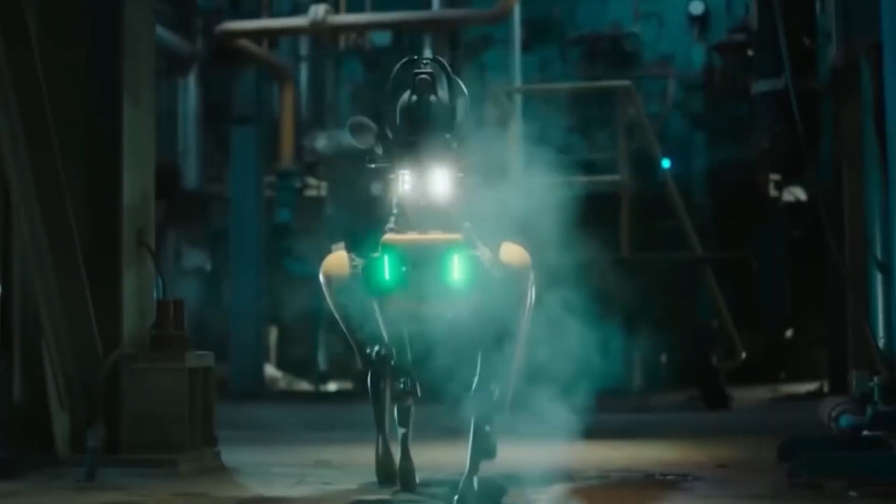What is Boston Dynamics? How many of you guys are familiar with this? Well, let's take a look at it.

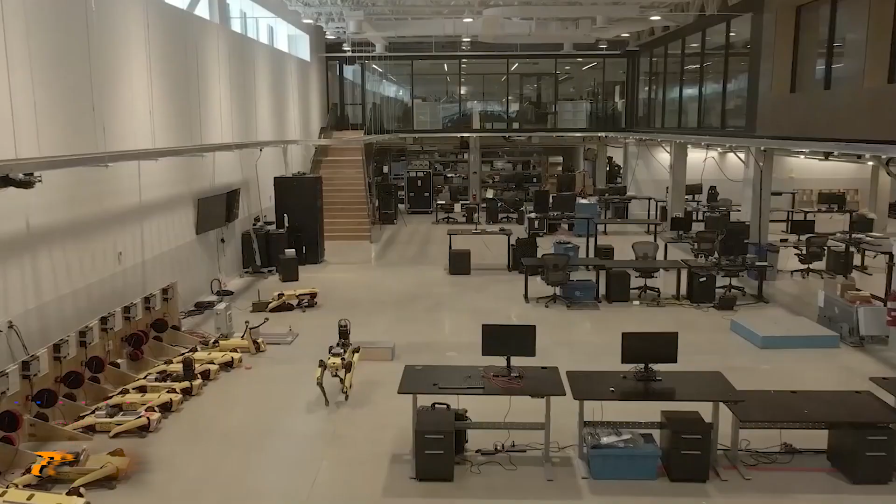As a Massachusetts Institute of Technology spin-off, Boston Dynamics is an American engineering and robotics design firm established in 1992. Headquartered in Waltham, Massachusetts, it has been part of the Hyundai Motor Group since December 2020, though the acquisition was finalized in June 2021.

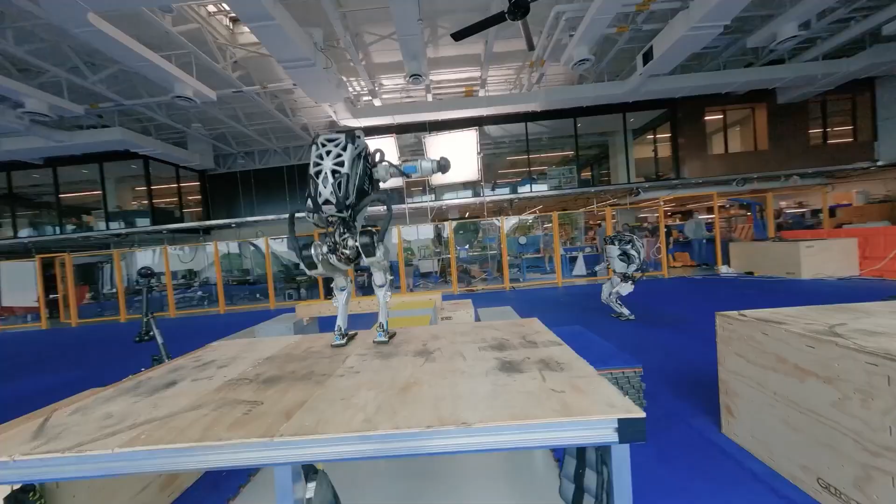In today's episode, we will watch a super robot army that Boston Dynamics has secretly built.

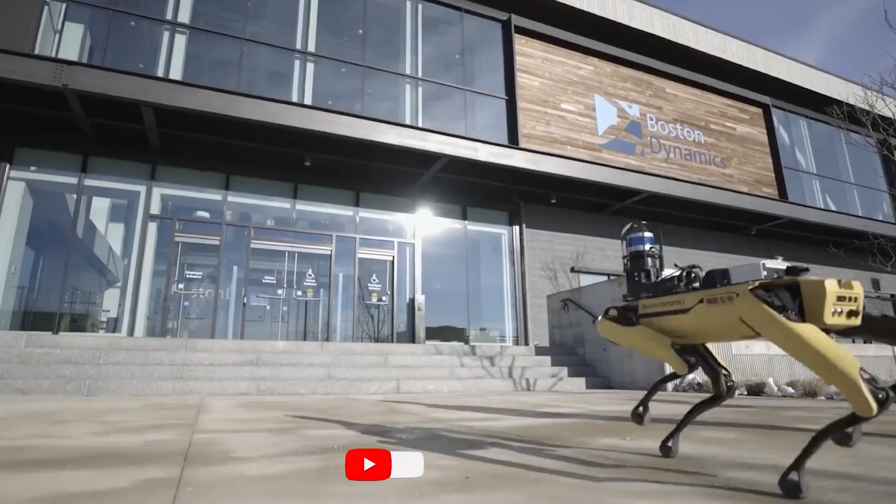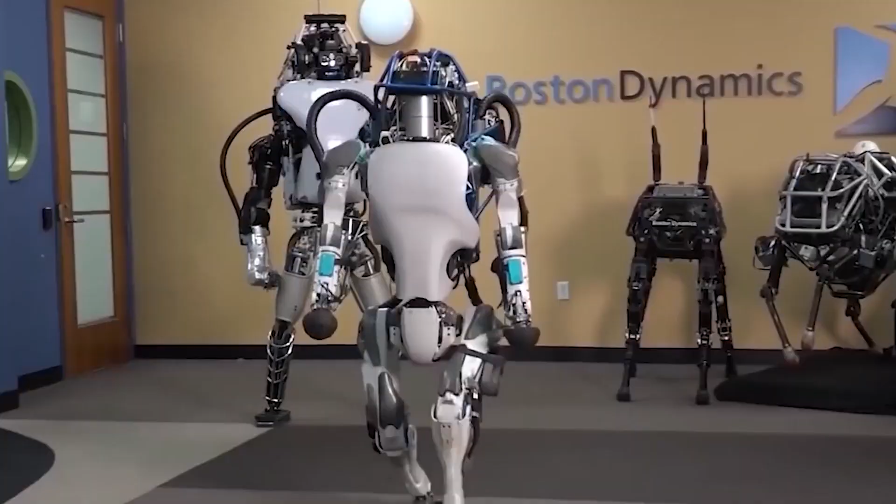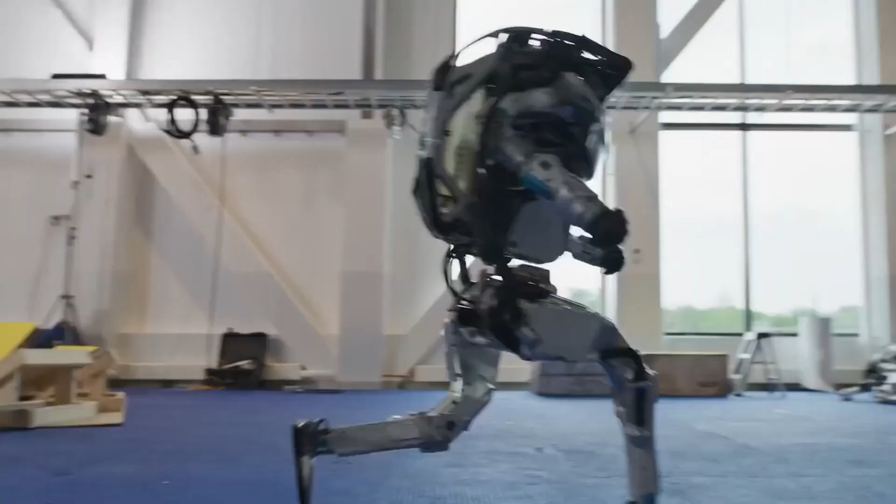The accomplishments of Boston Dynamics resemble the opening credits of a science fiction film. Beginning with the bulky Big Dog, a quadruped robot made for the military, the business has watched each new generation of robots relentlessly outperform the previous. Their announcements can occasionally make you feel more uneasy than impressed. What was formerly only hypothesis is now regularly transported from Boston Dynamics' plans.

It might just sound funny, but let's see it in detail some more.

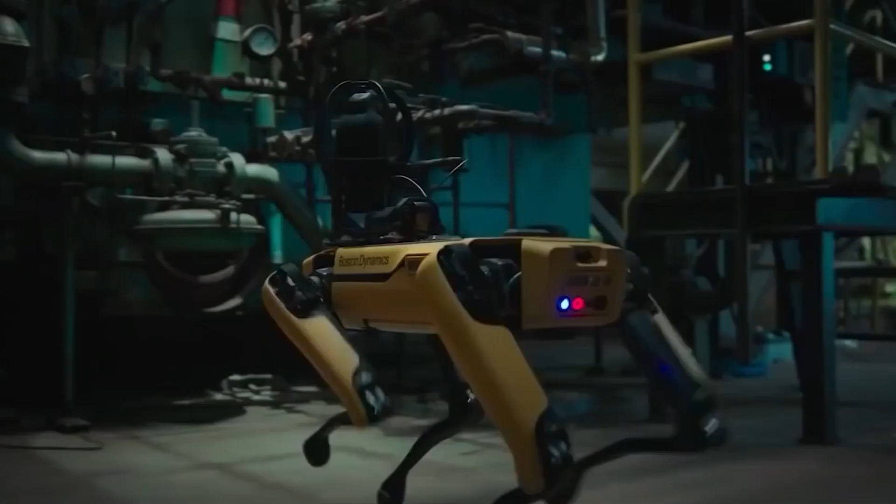Marc Raibert established the business after separating it from the Massachusetts Institute of Technology in 1992. The Leg Laboratory, Raibert's research facility at MIT and Carnegie Mellon University, served as a foundation for the corporation. The scientific foundation for extremely dynamic robots was established in part by the Leg Laboratory. These robots were inspired by the ability of animals to move with agility, dexterity, perception, and intelligence. The robots' similarity to their human creators grows throughout.

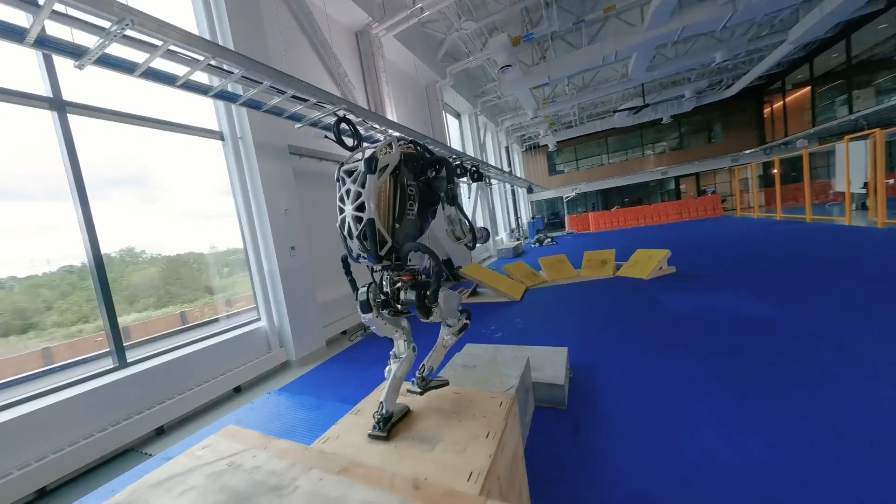In this video, I'll examine the startling rise of this groundbreaking robotics company and provide a detailed analysis of its expanding super robot army. Since Big Dog, Boston Dynamics has gone a long way. Look at this family, or super army of robots.

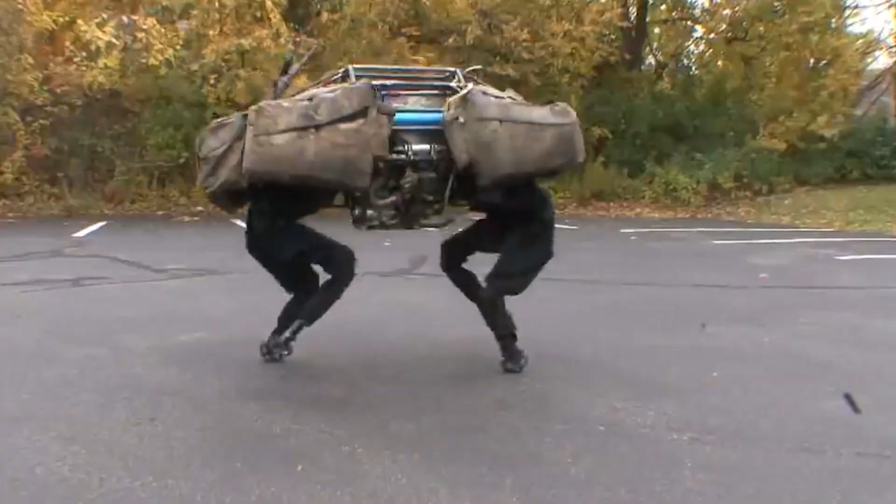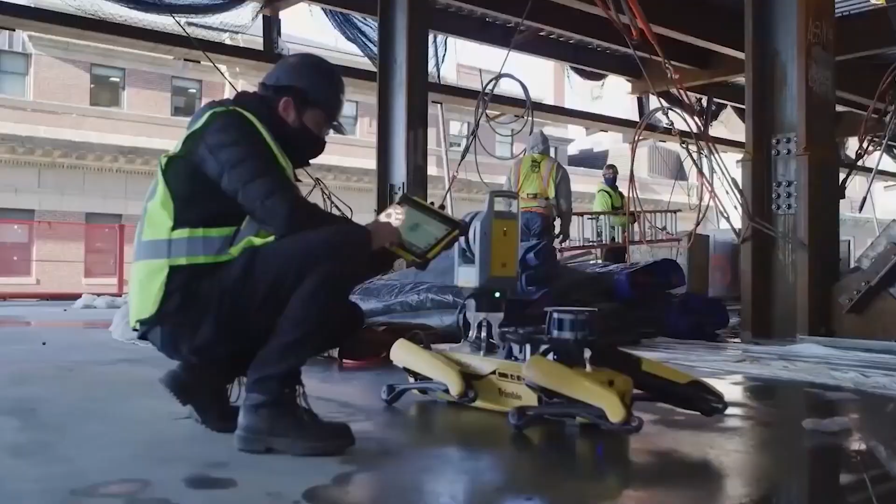Spot, a direct descendant of Big Dog, comes first. Spot is as graceful as it is accurate, unlike its grandfather. Spot can move across practically any terrain with ease and incredible mobility. It's ideal for jobs requiring routine inspection and data collection. Plus, the entire process can be automated, which is much better.

Now we'll dive into the core of the topic of what Boston is trying to build. Is it a robot, or is it a robotic army as they call it? Well, let's find out. Boston Dynamics aims to design and build great robots that improve people's lives.

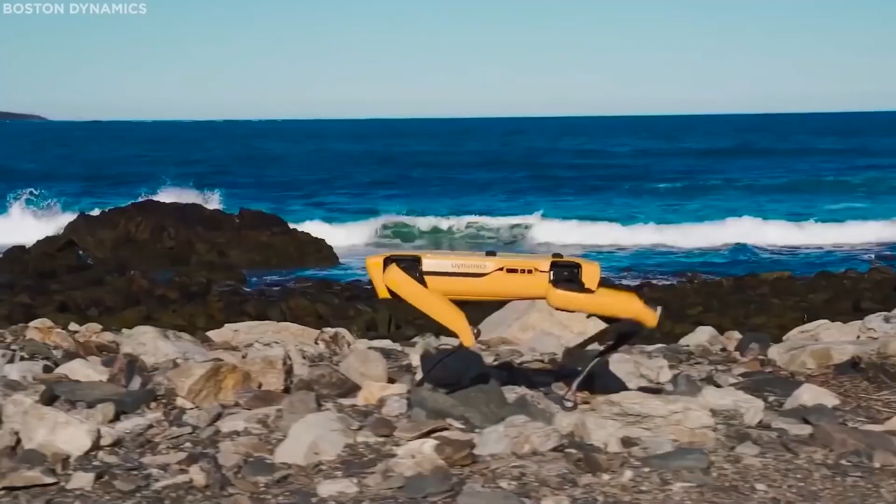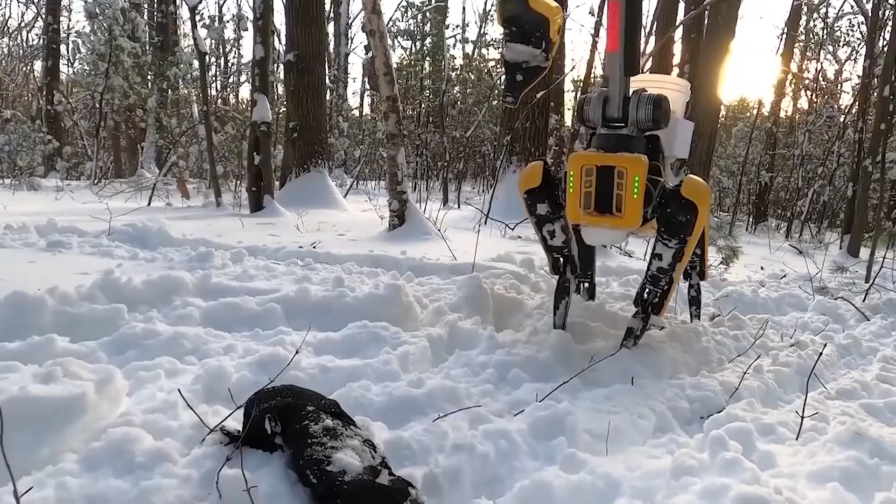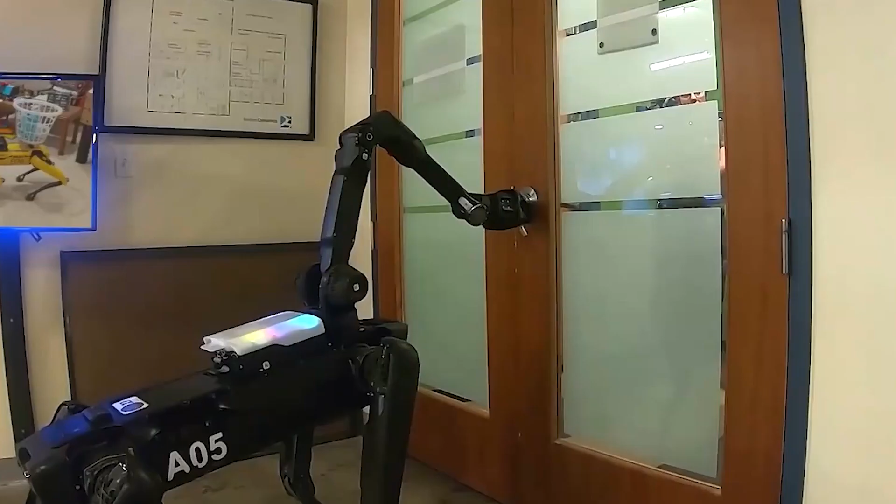A significant engineering issue is creating machines close to human and animal mobility, skill, and agility. Our curiosity and respect for nature drives our work on robotics. The robot's feet allowed it to traverse through rough terrain. Now the robot has hands, and these simple grippers give the robot a new life. It has a 4K camera and an LED light to examine an object before picking it up. In other words, Spot will open the door and leave by itself if it wants to go for a stroll.

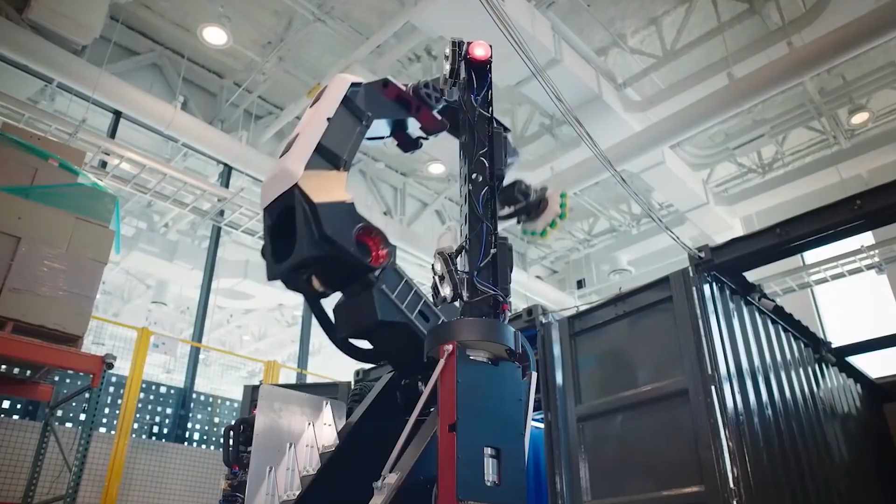The powerful Stretch is the next opponent. Stretch was created for manufacturing labor and could assemble and unload pallets. Despite its size, it's no less graceful and can easily carry weight around a warehouse or even a factory. This makes it much more adaptable in its function and eliminates the requirement for fixed infrastructure.

Of course, the most sophisticated humanoid robot in the world, Atlas, who can now backflip, steals the show. The building has received significant improvements since it was first revealed in 2013.

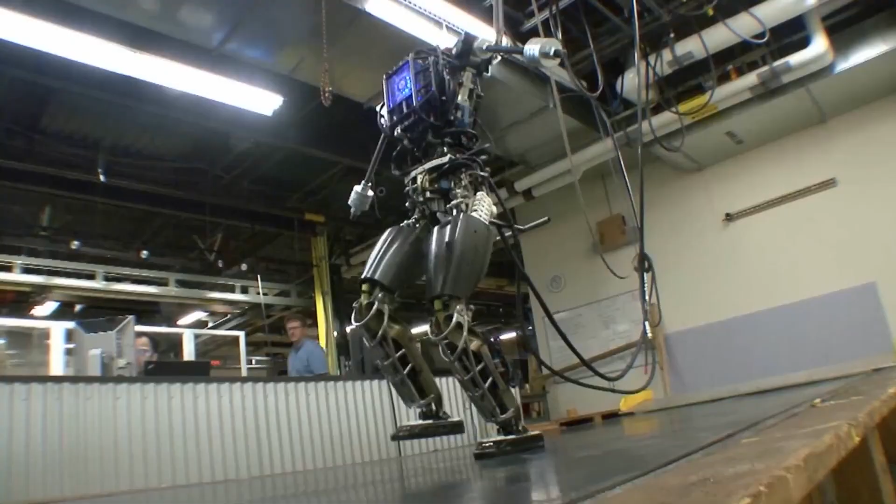A 1-year-old youngster can hardly walk, said DARPA program manager Gill Pratt when comparing Atlas to a child. A 1-year-old baby frequently trips over things. Thus, this is where we are right now. What is the structural appearance of this Atlas? After over 10 years, Atlas is finally fully operational.

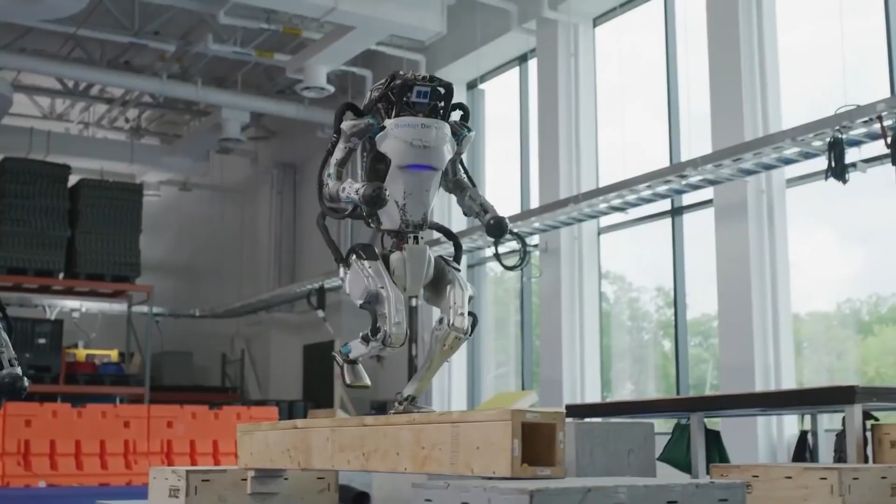The 190-pound robot stands 5 feet tall and has 28 hydraulic joints. It can travel at a top speed of 2.5 meters per second and uses sophisticated algorithms to navigate a variety of difficult scenarios. The Boston Dynamics team used behavior libraries to help construct complex routines and more effectively achieve trajectory optimization to achieve such exact mobility.

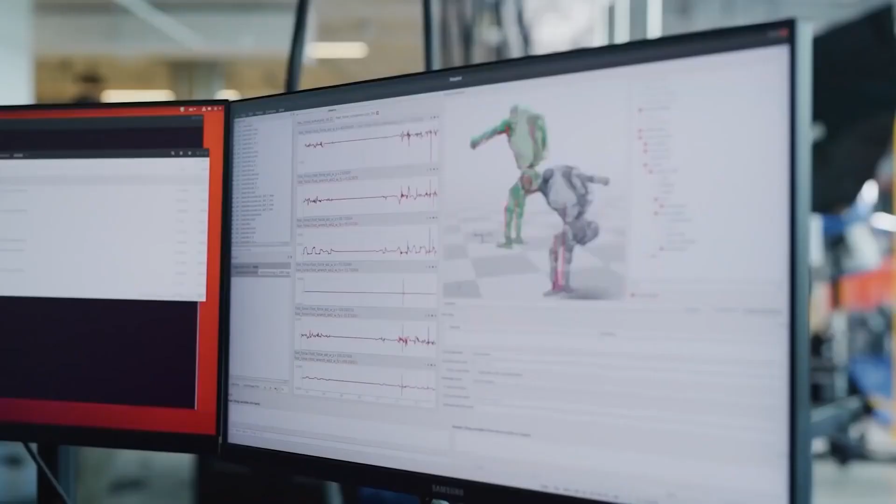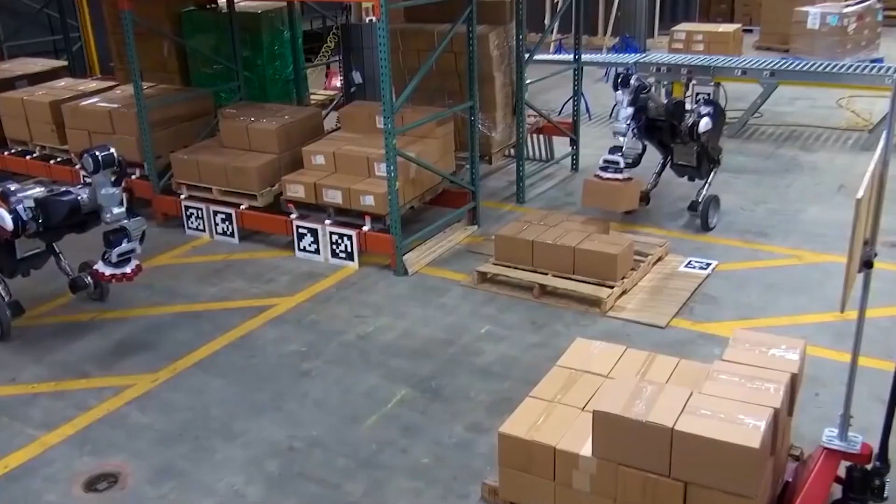All we have to say is this huge army of robots is an outstanding accomplishment all around. But what does this mean for us? Boston Dynamics frequently wants to highlight how amiable its robot family is. In their ideal future, robots are our friendly companions rather than our oppressive overlords.

Their robot, Spot, acts like a dog. The toughness of these robots is part of their appeal.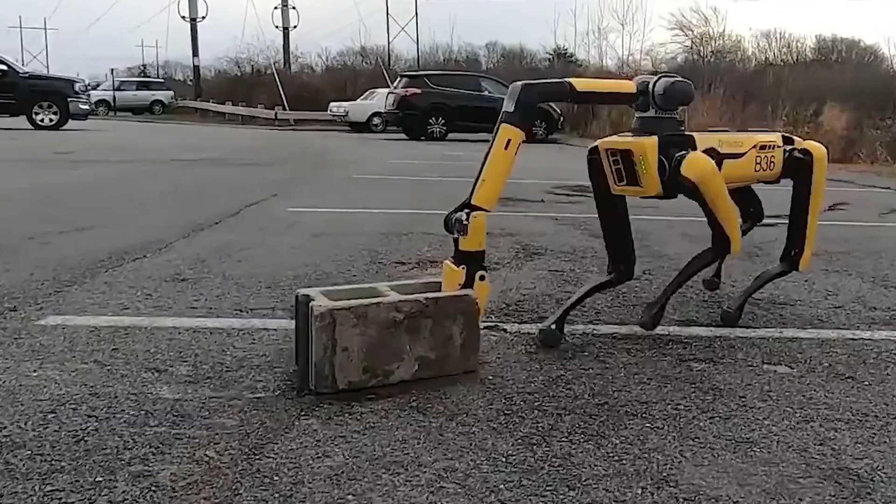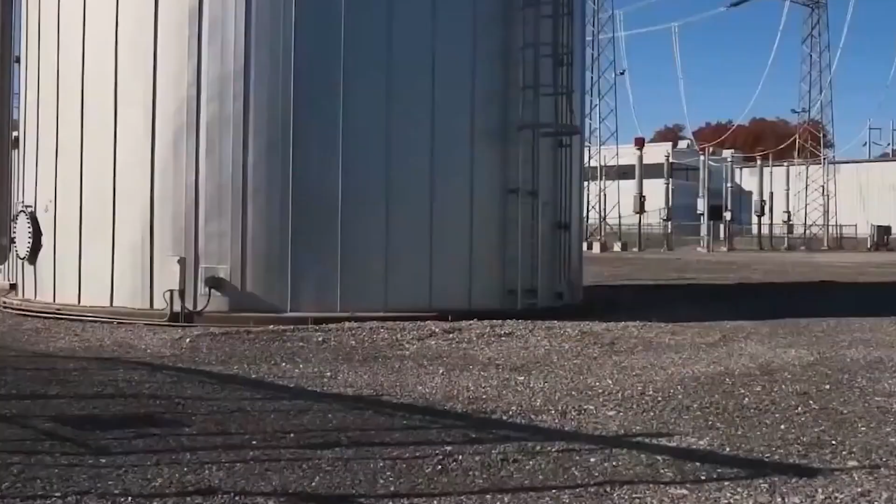They can perform the riskiest tasks you'd prefer not to assign to people. Some of their robots' main uses include examining construction sites and monitoring electricity cables in dangerous and extreme areas. This, though, is another astute PR move.

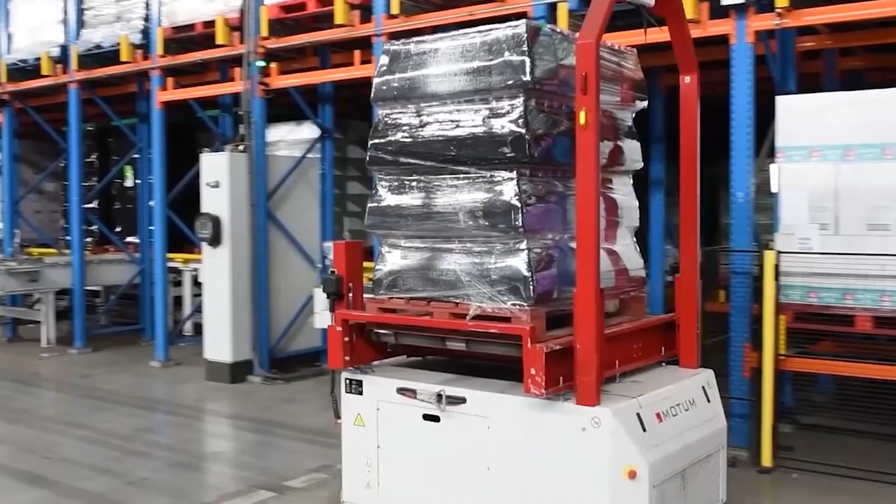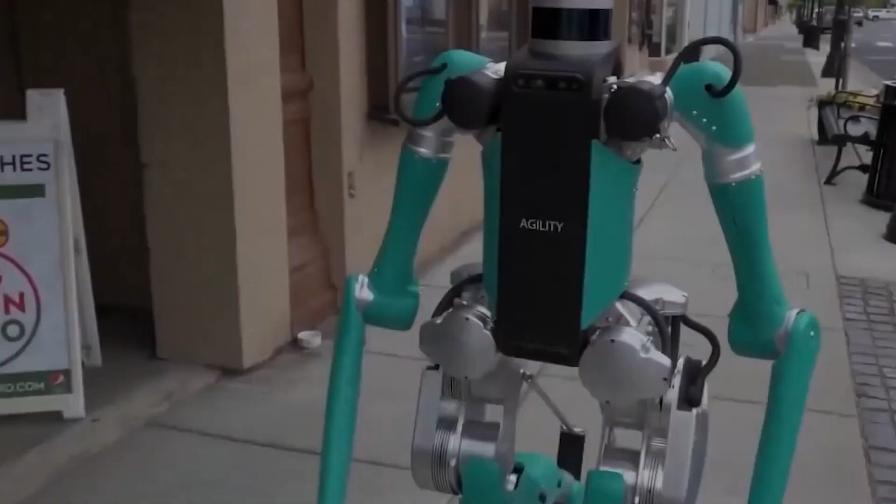Experts have emphasized that robots and intelligent algorithms will destroy much of the labor market. Self-driving vehicles will quickly displace large numbers of workers, from warehouse trolleys to enormous trucks in distribution and transportation. No obvious barrier prevents humanoid or quadruped robots from performing similarly in the security or construction sectors. Convenience, not conquest, may lead to robots assuming control. The Massachusetts-based business is adamant about disputing this assertion.

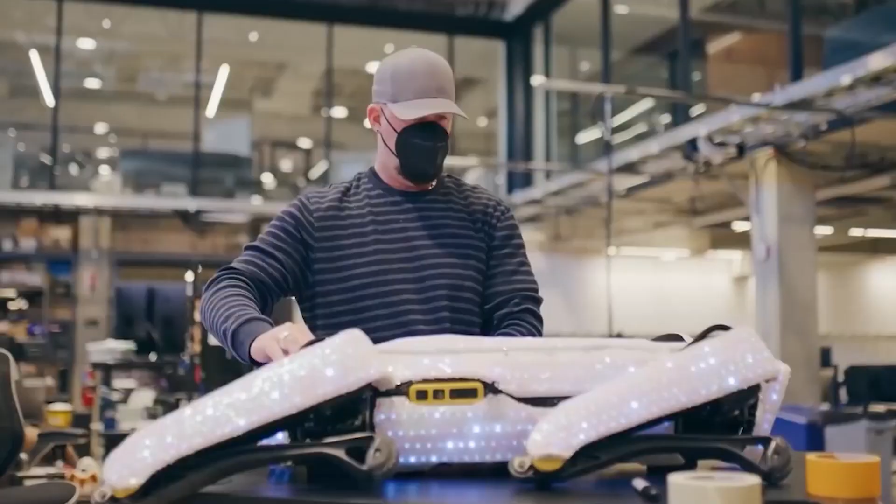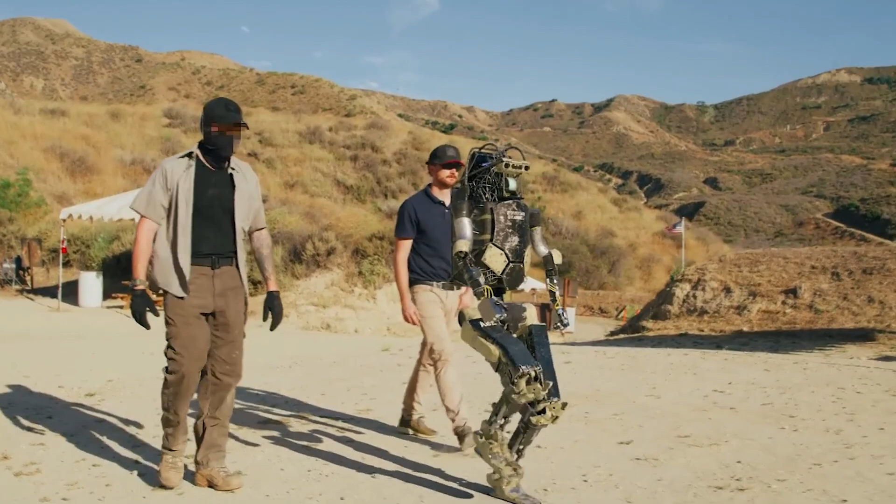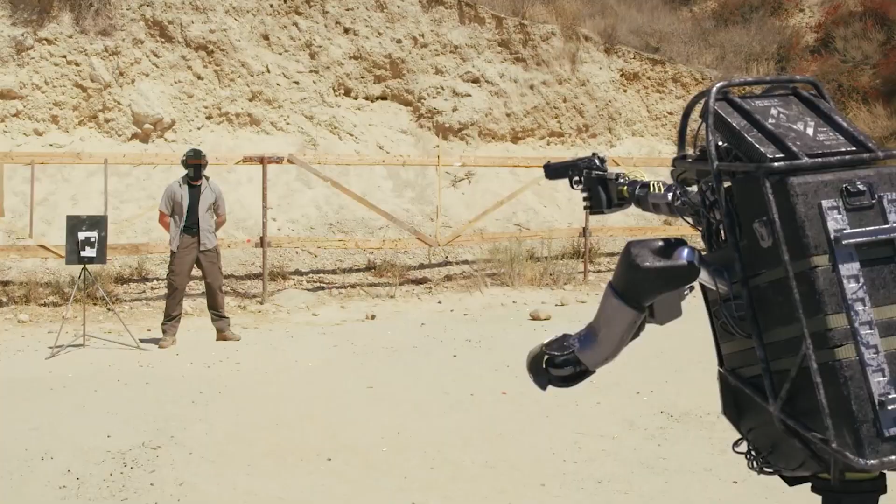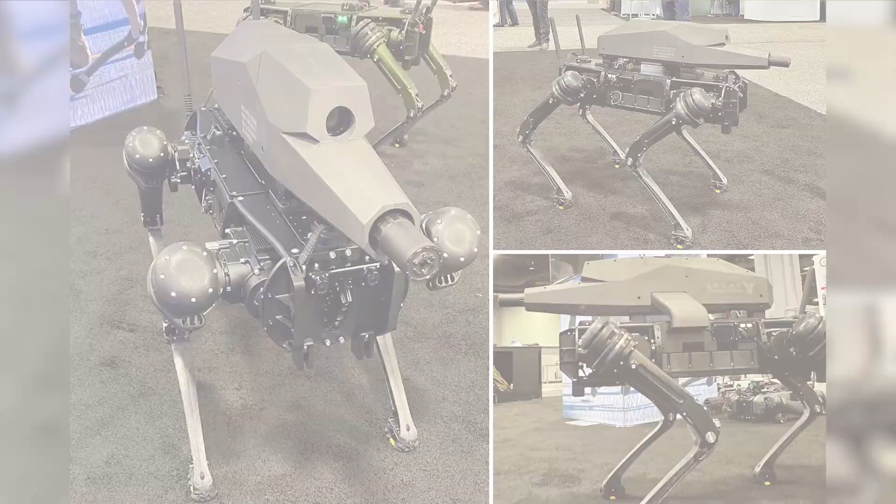In one imposing demonstration, US company Ghost Robotics equipped a quadrupedal robot with a bespoke rifle on its back. The US military is testing Ghost's four-legged robots, opening the door for future robotic recruits. DARPA, the Defense Advanced Research Projects Agency, was an enthusiastic early funder who recognized the potential of these four-legged systems to assist in hauling heavy equipment over difficult terrain. These contracts were for research and development for the US military.

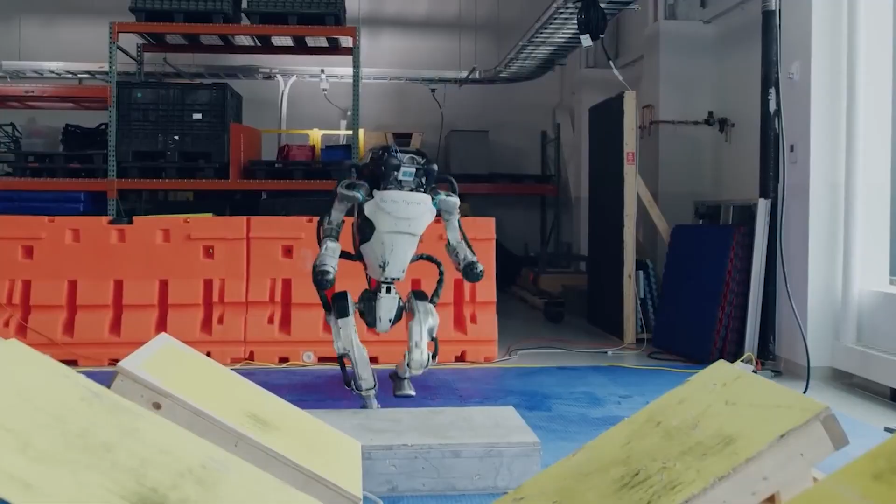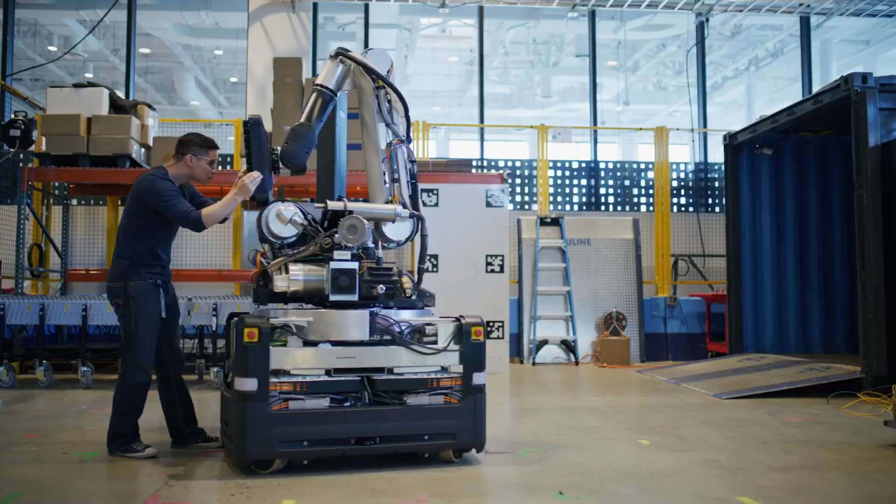With Atlas, they had a robot capable of moving quickly, picking up objects, and performing light parkour. Nonetheless, this was cutting-edge technology intended to show what was possible. The engineers at Boston Dynamics had to simplify their work and focus on regular warehouse operations. The Handle robot, according to Blankespoor, may have the same features that made Atlas attractive for use in the warehouse, meaning it had a compact footprint and could pick up large boxes. But it was far simpler than Atlas, since there were a lot fewer moving components.

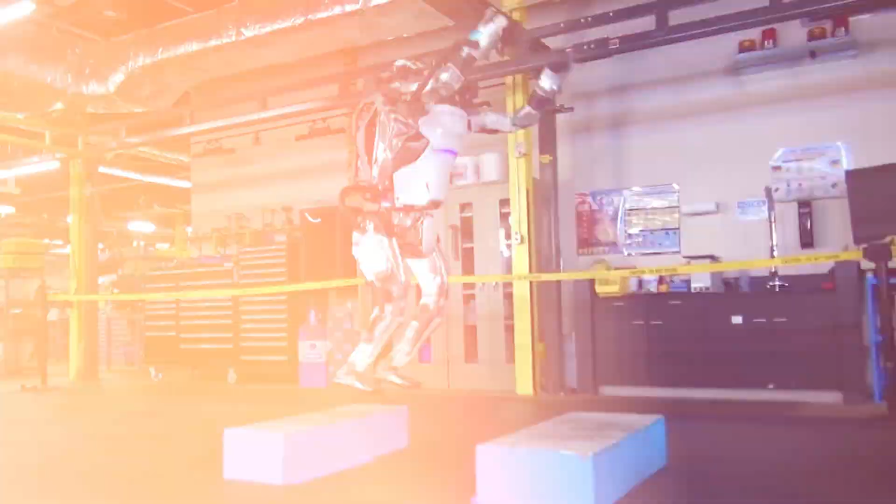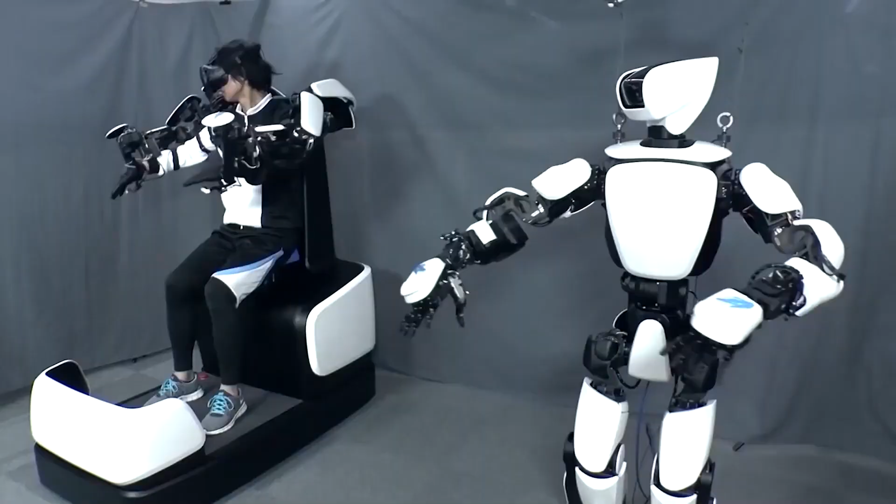Future technologies will probably be hybrid. Robots will replace humans in some of the most arduous and dangerous jobs in the home. The biggest change in tech usage since the internet's inception will result from this. Yet, sooner or later, robots will undoubtedly also participate in warfare, even if it doesn't resemble Arnold Schwarzenegger's Terminator in every way.

This isn't Corridor Digital's first attempt at mock robotics videos. Back in June, the company released a clip of what appeared to be a robot from Boston Dynamics beating up people in a warehouse. Because people mistook that clip for reality and became completely alarmed, Corridor later released a behind-the-scenes video showing how they recreated the robot and produced the video.

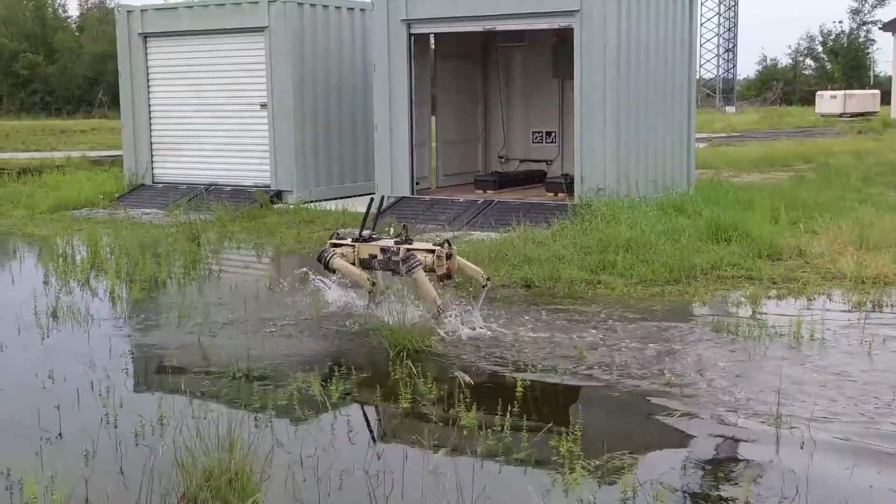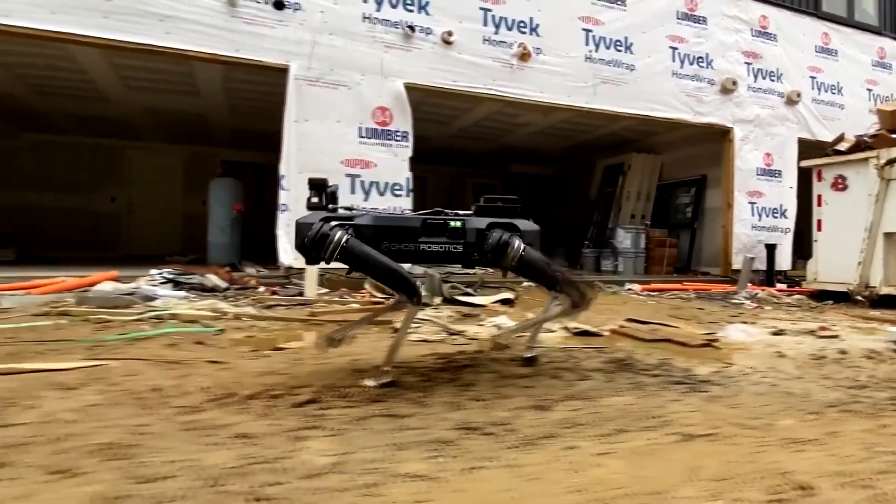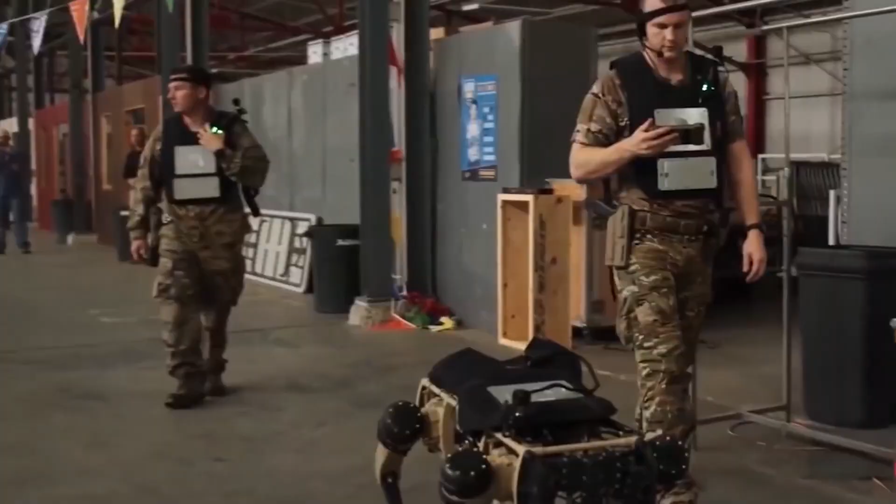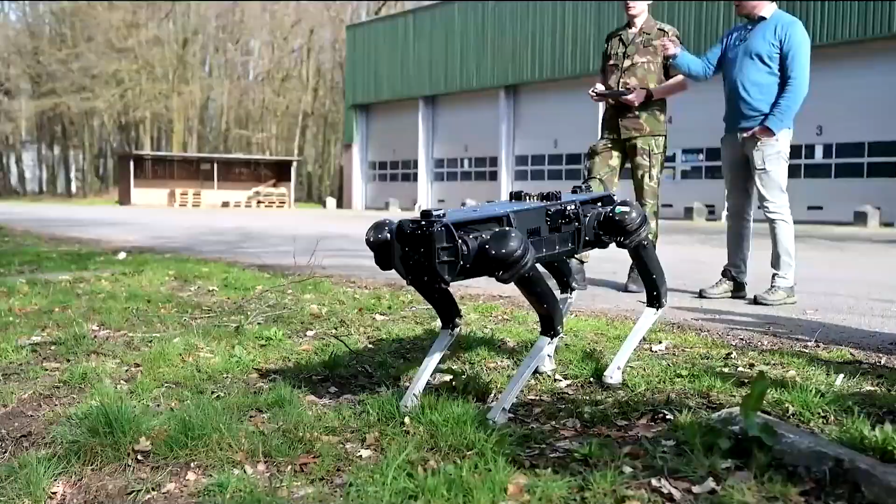Ghost Robotics recently equipped its Vision 60 four-legged unit with a specially made remotely operated gun from Special Warfare Operations Research Development International. But what do you think though?